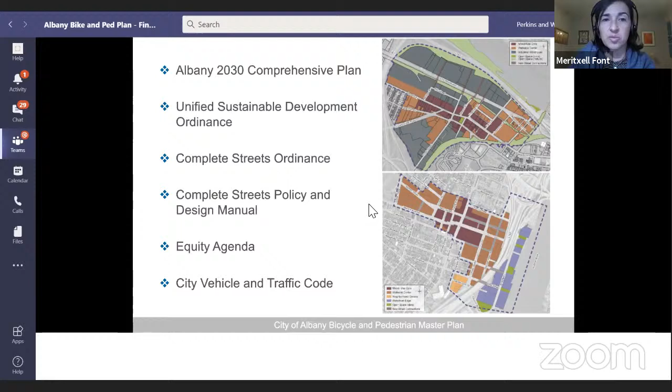So with this, in the plan, you will see that we did a thorough analysis of the existing networks, both for bicycling and walking. Before we did that, though, we reviewed the existing plans, so there's a summary of some of the existing plans that relate to walking and bicycling, including Albany 2030 Comprehensive Plan, the Unified Sustainable Development Ordinance, Complete Streets Ordinance, the Complete Streets Policy and Design Manual, the Equity Agenda, and the City Vehicle and Traffic Code.

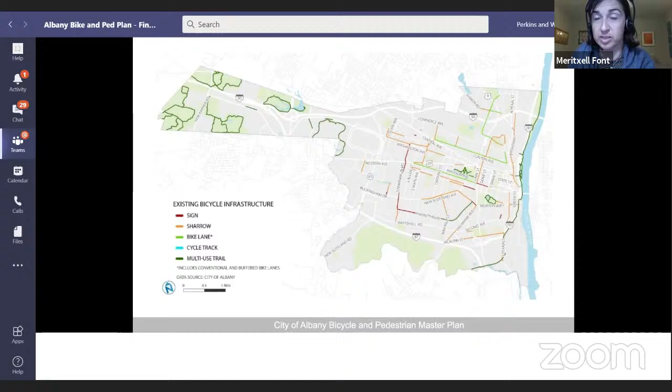We started by mapping the existing network, and we did that because we looked at the 2009 plan. So we wanted to see what was in that plan and what was the existing network. The map that you see here contains trails, in dark green, but it also contains sharrows, which, as some of you may already know, are those streets with, in most cases, horizontal and vertical signing saying that this is a space where the road should be shared by vehicles and bicycles. Bike lanes are those that are painted on the street, and cycle tracks are those that are separated from vehicles.

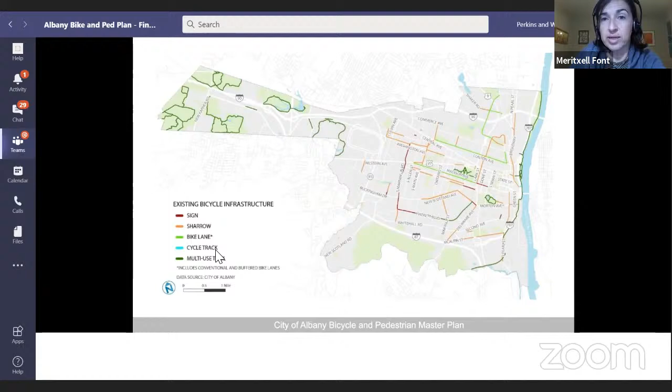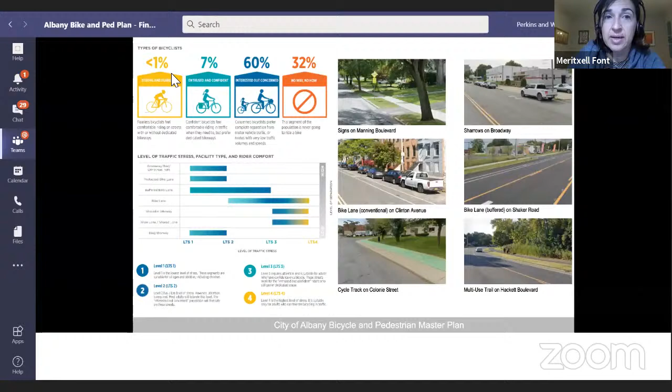The image that you see here to the left is a result of research that maybe some of you have already seen, where it says that less than 1% of people are fearless bicyclists, as we call it — they're willing to share the space with vehicles in spaces where the speeds are high and there's a lot of traffic. There's 60%, or we could add these to the 67%, that are people who are interested. So some of them are more comfortable than others, but the majority are interested but concerned, so they will only bike in places where they feel safe, and if possible, if they don't have to share the space with the vehicle.

And there's also 32% of people that will never walk or will never bike. But with this plan, what we were focusing on is this center group — the 60%, potentially 67% — who would bike if you put the safe infrastructure in place.

We also looked, tied to this classification, at the level of stress, which is a combination of factors. So we looked at the level of stress of the existing bike infrastructure, and the level of stress considers the number of lanes, vehicle speeds, presence of on-street parking and bicycle facilities, and available space for bicycling to determine a cyclist's exposure to traffic.

And what we see here is that a bit less than 50% is at level of stress 1 or 2, which is good, but there's still more than 50% that is under level of stress 3 or 4, which means that most people will not bike or are not comfortable biking in more than 50% of the existing infrastructure.

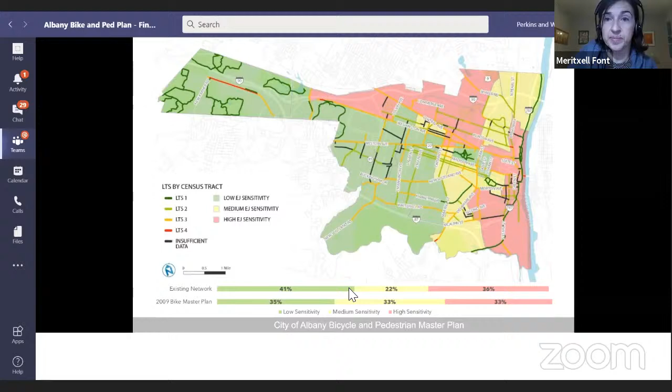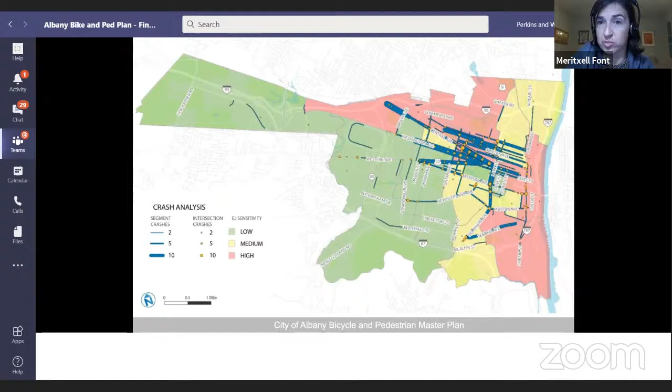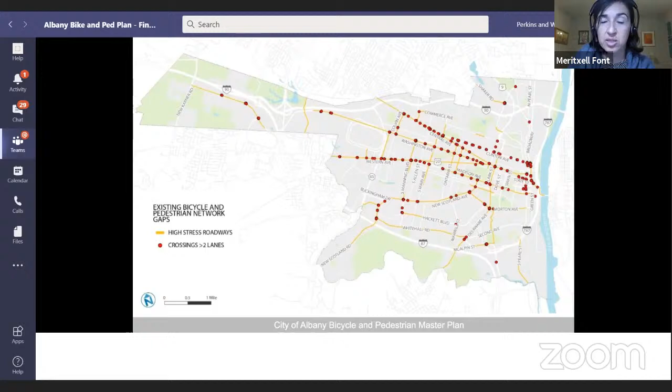After that, we looked at the gaps and opportunities of the networks. The map on the screen shows high stress roadways, which are basically roads with more than 2 lanes and high traffic volumes, as well as crossings that require crossing more than 2 lanes.

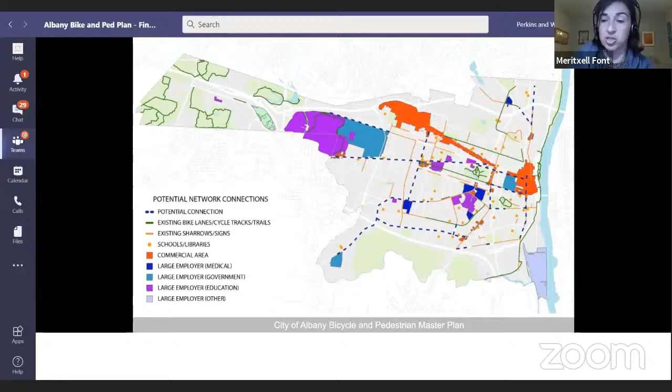For this plan, we used several communication channels to reach all of you and collect feedback. The first thing we did was put together the website, which I hope all of you have had the chance to look at, with all the project information there. There's a Get Involved section with a wiki map where you can put comments, choose which mode you want to comment on, add an icon, and leave a comment. We also put together an online survey.

When we finalized the outreach, the participation was very successful. We had around 500 people entering the wiki map and leaving comments, and we also had 340 responses in the online survey.

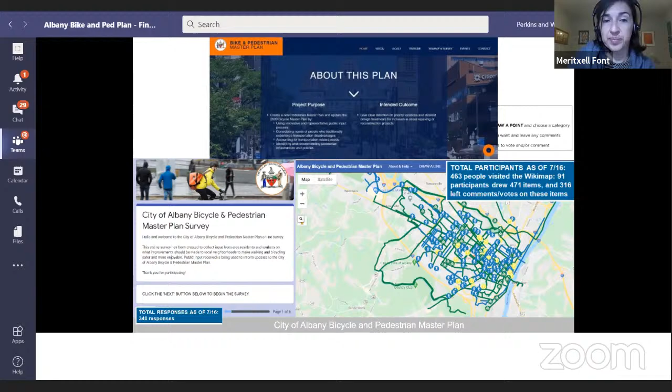In addition to that, we did some virtual meetings. The idea was to do in-person meetings, but because of COVID-19 we had to move everything to remote. We did one meeting that was recorded, explaining everything about the project, the goals, and where we were at that moment. We did a second meeting for the bicycle user group, and then we did 6 meetings.

We divided the city into areas - I'll show you the map now - and then we met with different neighborhoods. The participation across these meetings was close to 100, although it's a bit difficult to say exactly because some people signed in to more than one meeting.

In addition to that, which we, the consultants, led during the month of June, CDTC and the city did some additional outreach, which you can see listed here. That was, and Zach, correct me if I'm wrong, maybe August, September.

Yeah, we started throughout the summer, and then we continued up until last month with those. CDTC also did some outreach in person at a couple of sites throughout the city that aren't on that list.

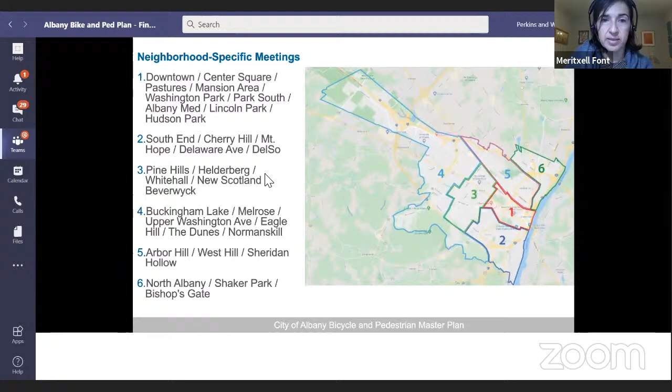In addition to that, we did 2 demonstration projects. The consultants designed and agreed to 2 locations with CDTC and the city. We proposed some designs and put them together in September.

The first one was Morton Street and Eagle Street intersection. As you can see in the photos, we designed curb extensions to shorten the crossing distance for pedestrians, and also to reduce the speeds of vehicles turning in.

We did a similar thing at the Melrose Avenue and Brevator Street intersection, where we put some curb extensions, but we also painted sharrow signs along Melrose Avenue to show how a bicycle boulevard could look. A bicycle boulevard is a street designed for slow vehicle speeds where bicyclists could feel safe biking.

The 2 demonstration projects were successful. We received good feedback, and some of the crosswalks have stayed there, particularly this one at the Morton Street and Eagle Street intersection. This design of the curb extension might stay when there's a permanent improvement of the intersection.

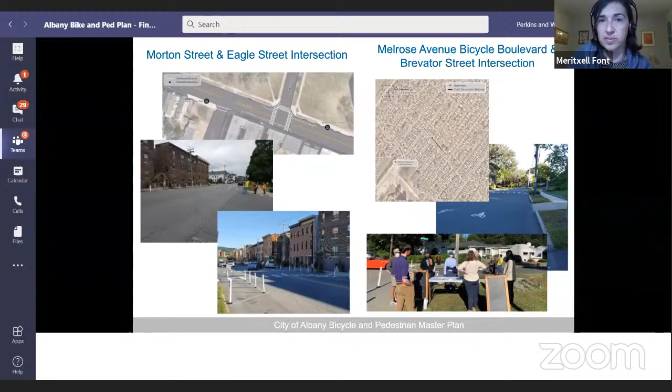So the next section, what I'll be talking about now, are the recommendations - the exciting part. What do we think should happen now to improve the walking and biking network?

For that, we followed the principles you see here on the screen, which reflect the visions, goals, and objectives of the plan. The active transportation network should be safe. Sidewalks, walkways, bike facilities, and crossings should be designed and built to be free of hazards and to minimize conflicts with vehicular traffic and street design elements.

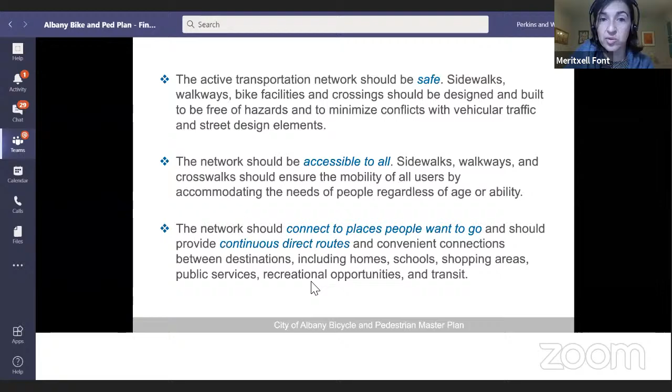The network should be accessible to all. Sidewalks, walkways, and crosswalks should ensure the mobility of all users by accommodating the needs of people regardless of age or ability. And the network should connect to places people want to go, providing continuous direct routes and convenient connections between destinations, including homes, schools, shopping areas, public services, recreational opportunities, and transit.

We will start with the bike recommendations. What you see here on the screen is a brief description of the steps that we followed to put together the proposed bike network.

First, we used the map that I showed you before to see where the gaps are in the network and what we should propose so that key destinations are connected with residential areas, for example, and how they connect to the regional trail network.

The second step was to conduct a technical analysis to determine facility type for each segment. For that, we used the table you see to the right, which is from NACTO. That table tells you, based on target motor vehicle speed, average annual daily volumes, number of lanes, and urban context, what facility type should be put in place.

So that the bike facilities are designed for all ages and abilities, we made initial proposals on how the facilities should look, then shared that with CDTC and the city to make sure what we were proposing was feasible. After that, we did several rounds of review of the network, and we put together the network that I'll show you in the next slide.

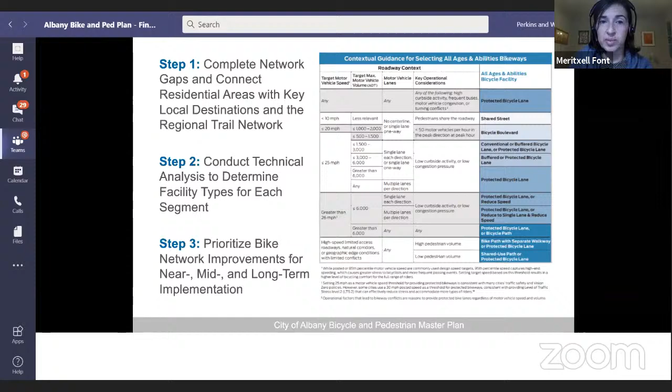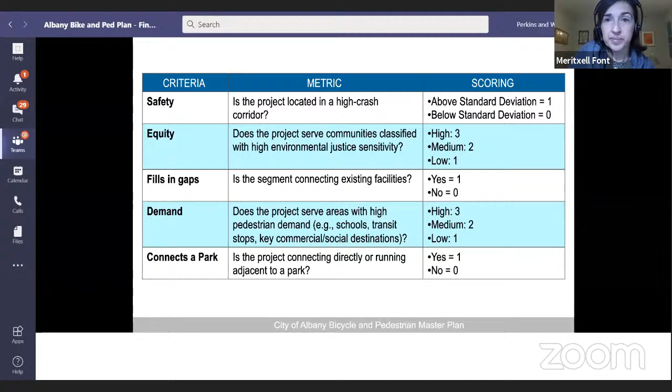I'm not showing the map of the priority network, although you will see a first draft of the map in the report, because the idea is that you tell us your feedback of the proposed network, and then we will update the map of the prioritization plus the table of projects, the list of tables.

In addition to this map, we also added some recommended traffic calming measures for bike boulevards and conventional bike lanes in the report, as well as intersection treatments for bicyclists and some branding ideas.

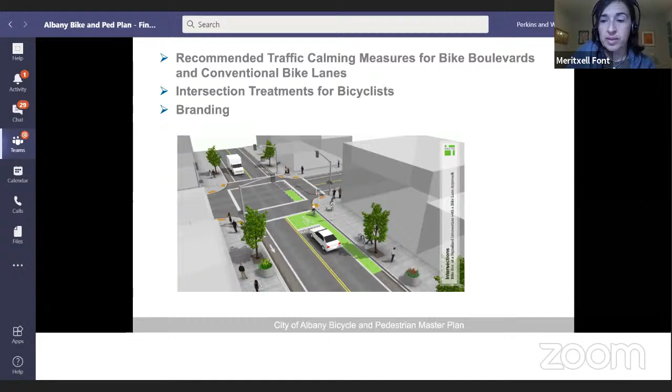And then we continue with the pedestrian recommendations. So for the pedestrian recommendations, we looked at both sidewalks and crossings. While the bike proposals are more detailed, these are broader recommendations for the entire city.

For sidewalks, we looked at arterials that didn't have sidewalks on either side, and when that was the case, we proposed a sidewalk on one side. We also looked at local streets longer than 1,000 feet, to make sure there were sidewalks at least on one side. And then we looked at where there were gaps, streets that had sidewalk but with some gaps in between intersections.

For crossings, we looked at the high collision corridors as identified in the collision analysis. We also looked at streets that were more difficult to cross, either because there were 2 or more lanes or because signalized crossings were more than 300 feet apart, and then streets near key destinations.

And this is the map of the proposed sidewalk network. You can see in black the existing network, and anything that's either orange, purple, or green is where we propose to complete the sidewalk network.

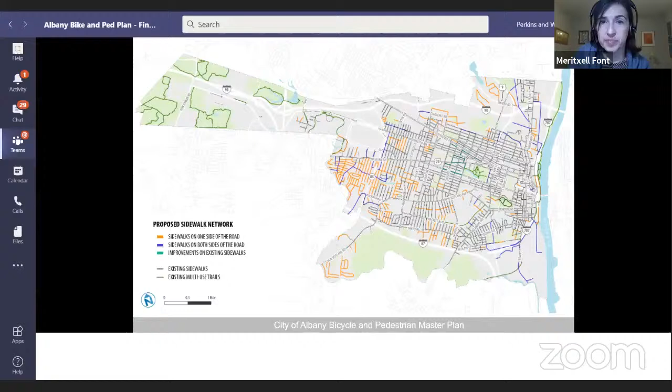We also did a map of the ease of crossing. The segments you see here in green are good for crossing, but the segments you see in orange or red are those that are more difficult to cross. I want to mention that in the final plan, we will be adding a zoom or more detailed map of downtown, because here it's a bit difficult to see.

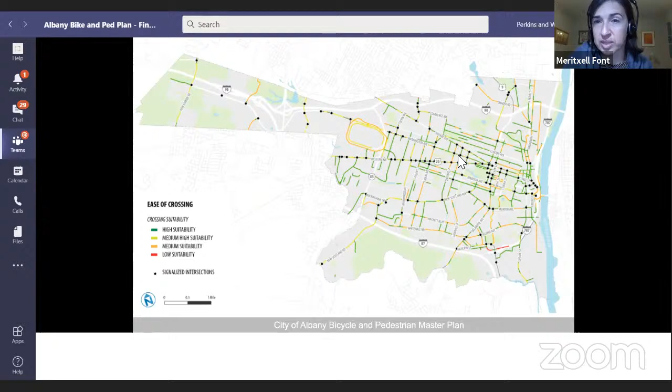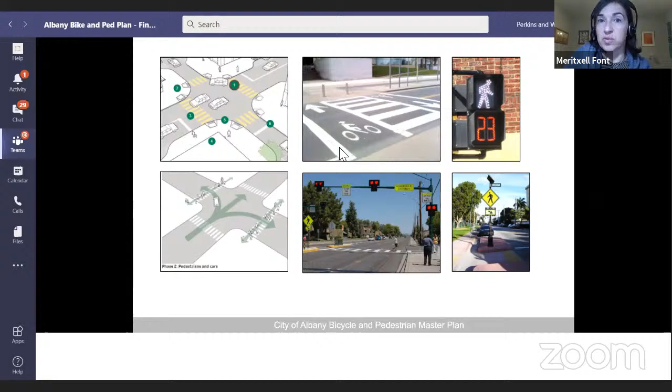Like what we did with the bicycle networks, we also added some improvements that could be considered for crossings. These include pedestrian leading phases for left turns where there's high pedestrian activity, maybe some HAWK signals could be considered, as well as audible signals, and some combined crosswalks for bicycles and pedestrians together. You will also see in the report some recommendations for ADA.

The last section of the plan, and I promise I'll finish in a few minutes and then we'll allow you to ask questions, are the maintenance policy and practice recommendations.

We start here with some programs to encourage walking and biking, such as community rides, bike races and other competitions, open streets events, as well as education programs to bring awareness of biking and training for those not used to biking, safe routes to school, and community groups.

Some other programs we included are bike share programs with electric bicycles. When we did the tour of the city, we were well aware that it's not flat, so electric bicycles could be great to connect the river with other parts of the city.

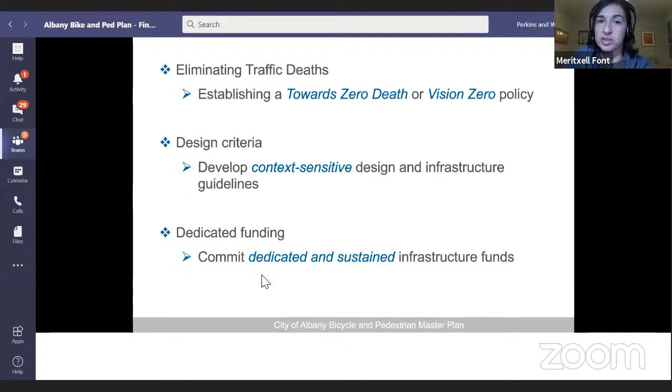In terms of policies, we recommend establishing a Towards Zero Deaths or Vision Zero policy, some design criteria such as developing context-sensitive design and infrastructure guidelines, which you already have complete street design guidelines for, and dedicated funding, committing to dedicated and sustained infrastructure funds for bicycle and pedestrian projects.

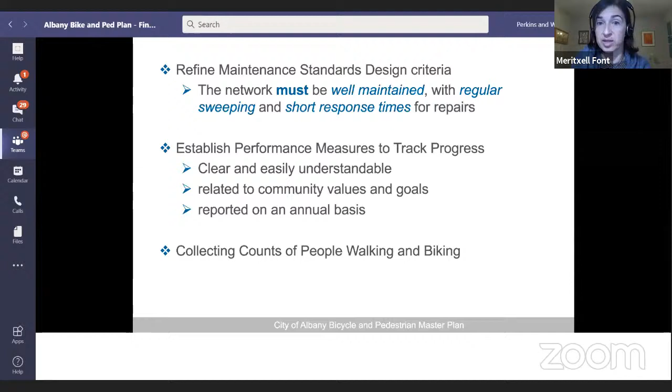In terms of process, we recommend refining maintenance standard design criteria. The network must be well maintained with regular sweeping and short response times for repairs. Establish performance measures to track progress, clear and easily understandable, related to community values and goals, and reported on an annual basis, as well as collecting counts of people walking and biking to learn if a completed project is really successful, and if not, why people are not using it.

The last part of the report: once we have the final list of projects for both the bicycle network and the pedestrian network, we will calculate the prioritization score using the criteria I showed before, and we will classify the projects as short term, medium term, and long term.

In addition, we will do a high level cost estimation for each project, and we will add a dollar sign indicator: one dollar sign meaning less than 350K. There's an error in the presentation—it should say from 350 to 500K, or more if the project is more expensive.

We also list potential funding sources, public and private, that could be used to implement the plan. And that's all in regards to the draft plan.

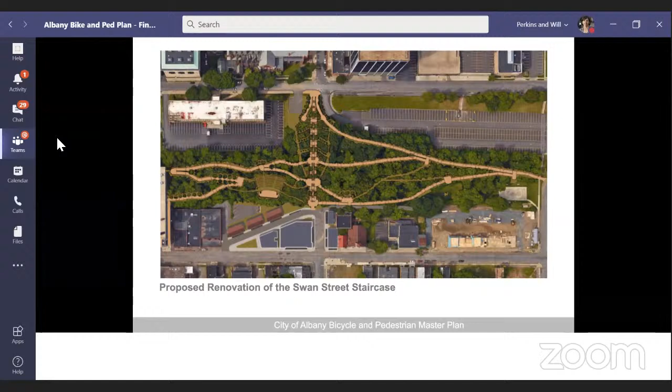I'll switch back to some more Q&A questions. There's a question from Lorenz asking why there are no connections to surrounding communities in the plan. Some examples he brought up were Delaware Avenue and New Scotland Avenue to Bethlehem, and Everett Road to the town of Colonie. There's also a second question on why the city isn't introducing '20 is plenty' zones throughout the city as part of an overall transportation plan to benefit all users.

I can start a little bit with the first one. We do recommend connections along certain corridors. One recommendation is for Western Avenue into the town of Guilderland, as well as Broadway into the village of Menands. We're trying to provide as many connections as possible to neighboring municipalities. If you feel we've missed some, particularly the ones mentioned, feel free to send those comments via email to me. We'll be saving the comments submitted in the chat and Q&A so they'll be incorporated along with the others we receive. Feel free to send anything else, or send it again if you want to emphasize a point.

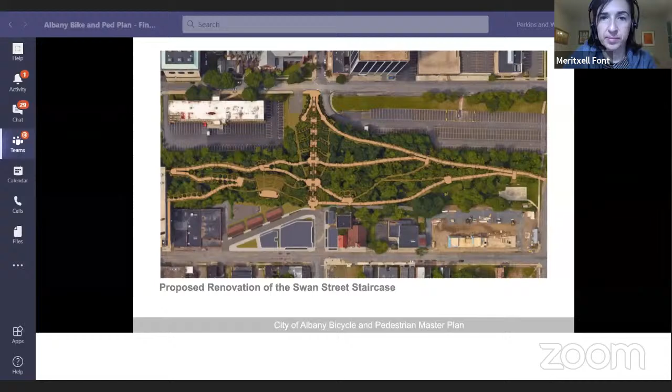And then we got a question from Bert Shu asking, what are some of the specific Albany streets recommended as bike boulevards? Meritxell, could we go back to the proposed bike network? Just a second, because this might help Ed too, giving some time to look at the map, but also for Bert. It's a good idea.

So I know Helderberg is recommended as one. I believe we have 2nd and 3rd Street, within West Hill and Arbor Hill. We have Berkshire Boulevard. So we have quite a number of bicycle boulevards proposed.

Because they provide a lot of security to cyclists who maybe are not as comfortable with riding now. It gives more options for people to gain that confidence and be able to ride throughout more of the city, and hopefully gives more options to people who potentially want to ride or walk, just providing safer streets in general. Usually at a little bit faster pace too, because it's usually easier to implement bicycle boulevards as compared to conventional bicycle lanes or protected or buffered bicycle lanes.

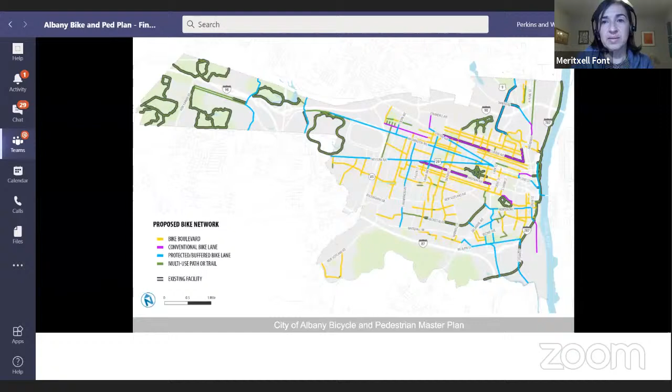So the reality, and what we saw and heard during all this outreach, is that there are bicyclists there, there are people walking, but all the intersections are pretty dangerous. So I mentioned the road diet, but curb extensions on the intersections, depending on how the bike lane would be designed. And looking at really what happens, collecting data at key intersections, to see what would be the best treatment there.

So we just got a question, someone had asked earlier, and I think we were responding with the last question on the bicycle boulevards, about what is new versus what is planned for the future. I think Michael's question was saying a lot of what is proposed currently exists. I'd say, going back to the bicycle boulevards, a lot of what is new or being proposed are bicycle boulevards.

And looking to find opportunities with multi-use paths, bicycle lanes on Washington and Western Avenues, and a portion of Central Avenue as well.

I think through this plan, there are a lot of streets that people are familiar with that may have been improved previously, but we're looking to build from that, and also provide opportunities for people to take alternate routes so they don't necessarily have to rely on busier streets to get around safely, while finding routes that are comparable in terms of time compared with the larger streets.

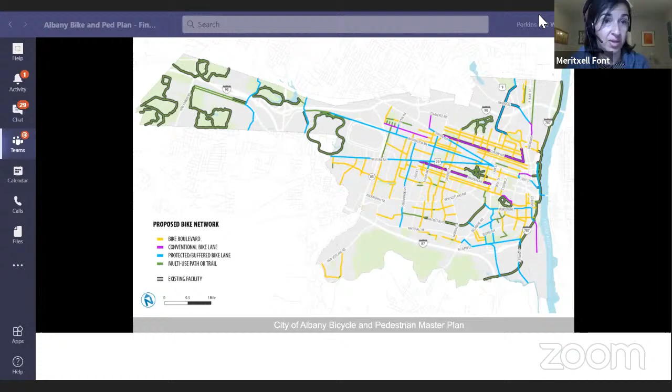In certain places transit ridership has decreased, and people either bike more—bike has become a real alternative. I'm sure you've read that bike sales went over levels never seen before. But some people drive more, and that's the reality as well.

So we think that if we collect traffic data right now, it might not be representative of normal conditions because of what's happening currently. We're discussing with the city and CDTC whether we should do that now or wait until COVID-19 hopefully disappears or no longer impacts our lives as it's doing now.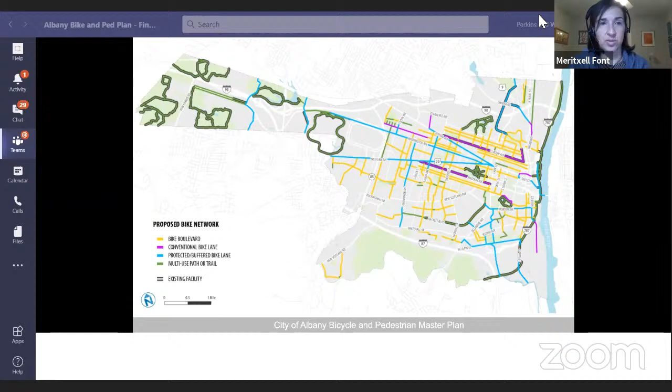I think there'll be benefits in waiting to see if new types of patterns or behaviors come out of the pandemic once it's ended, because it might not return to normal—it might be a new normal. Exactly, and I think we'll have to look at that whenever we decide to start implementing portions of the plan.

Ian has a comment saying it appears the plan proposes extending the Hackett multi-use path from Holland to Madison Avenue—is that correct? Yes. We're proposing a multi-use path along a paper street portion of Lark Street connecting to Madison Avenue, and a portion that would be on-road from Madison to, I believe, Morton.

Bert commented that for bicycle boulevards along Morris and Myrtle, it'd be great if one lane of parking was removed, since tight one-way corridors require watching out for car door movements left and right. Some of this could be looked at if the city decides to implement the bike boulevards along Morris and Myrtle—maybe some lane narrowing or infrastructure options to narrow the road, so it provides more safety for cyclists who won't have to be as afraid of car doors opening and other obstacles along the street.

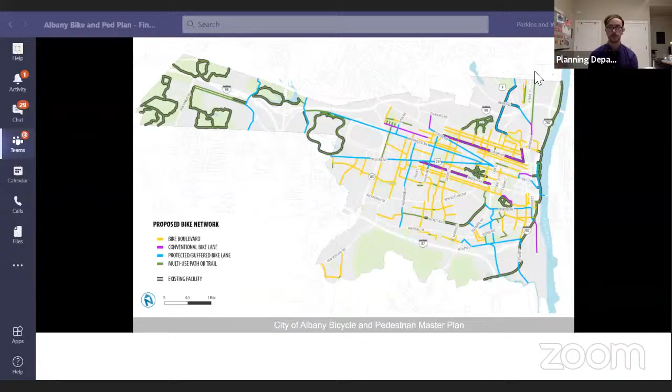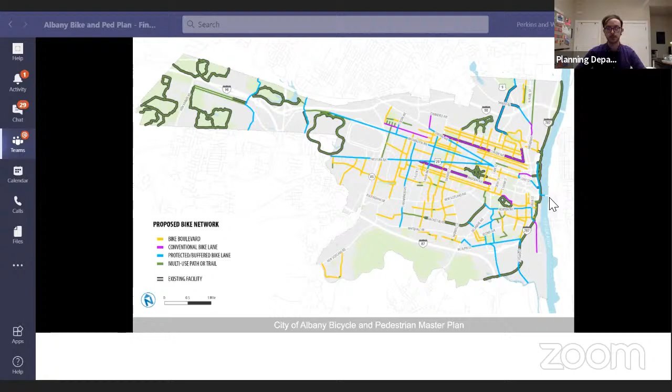It's coming up on 8 o'clock. In response to that, Brent stated that the Albany Bike Rescue has a bike voucher program aimed at low-income and at-risk populations—anyone who obtains a voucher is entitled to a free bike. Thank you, Brent, for sharing that with the group. He adds that the bike comes with a helmet, reflective vest, safety manual, lights, as well as a safety kit.

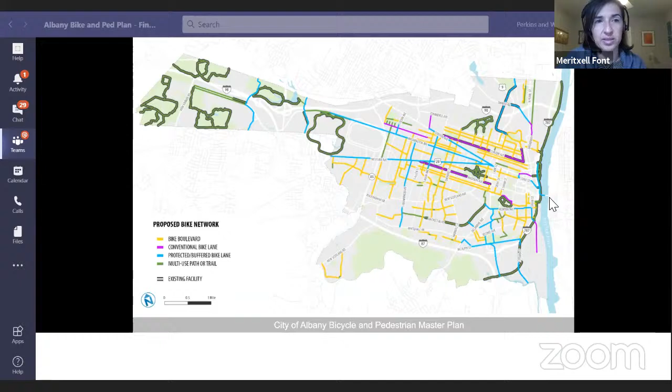Zach, I wanted to add before we finish—since we didn't include a slide with the schedule—that the final plan should be completed by the end of January 2021. Thank you for bringing that up, Meritxell.